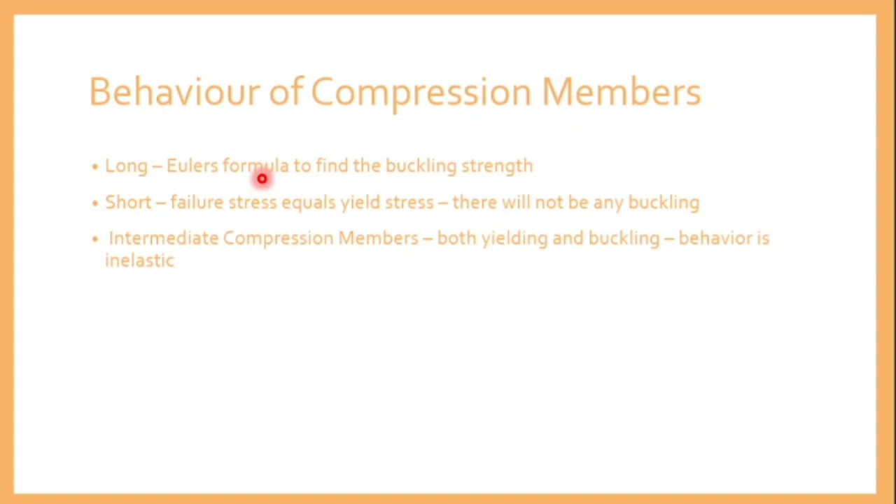Between these three, you can use Euler's formula for solving long compression members to find the buckling strength. If you have a short compression member or short column, you find the failure stress by finding the yield stress of the structure, that is stress equal to load by area. Simply you can use that formula to find the compression strength. But if you're using a long column, you have to use pi square EI by L square. This is Euler's formula, since you need to find the buckling strength.

The behavior of an intermediate compression member is that it might yield or it might buckle, so these two possibilities are there. Their behavior is inelastic. So before analyzing a member, you should check whether it is a long, short, or intermediate compression member. Within these three, your solution will apply accordingly.

Stress is load by area. Y, they have indicated in the sense of yield stress. Y stands for yield, F stands for stress. So if you want to find yield stress, you have to find yield load, that is Py divided by A. So you are cross multiplying here.

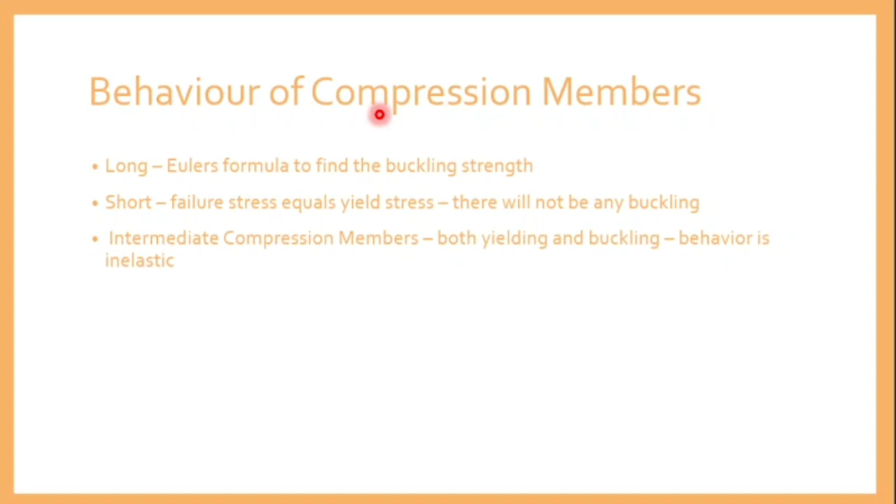When your material is purely under compression mode, you have a definite stress carrying capacity. This is brittle. The brittle material takes load up to the yield load. When you increase beyond the yield load, it will not change further. So this is the mode of failure. The idealized material behavior for rigid and plastic — rigid is also called brittle.

If you want to find the reason for decreasing strength, the first one is imperfection, as I said in the last classes. Your column will have imperfections. That is, if 250 mm by 300 mm is the given dimension, there might be imperfections while constructing. So this is one reason why you are not getting the whole load — along with initial lack of straightness.

The column will not be straight throughout from the bottom to the top. If you check that, you can use a theodolite for finding the straightness of the column. You can check this for a multi-story structure — there will be deviation from the ground floor to the top floor. The column will have slight deviations. Due to this deviation, the column or compression member might not be able to take the full load. What formula are you using?

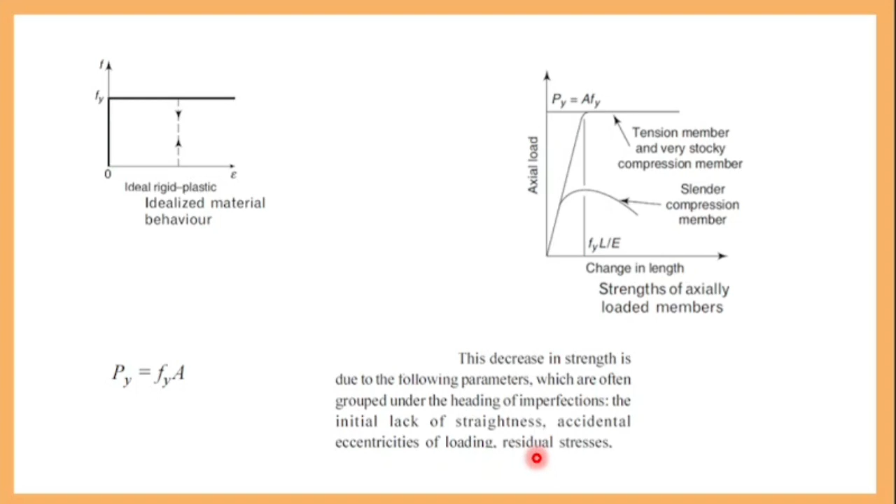If you are making a steel member, your accuracy is much higher because steel members are precast, so your accuracy of straightness will be much higher. If you are making a concrete element, your perfection might get lagged, plus accidental eccentricities of loading and residual stress. Due to these reasons, your column takes the reduced load and it is buckling.

Now you take IS 800 table 10, the buckling class of cross section. Check page number 44. When you want to design a compression member, your member is either an I section - this is rolled steel I section, and this is welded I section. What is the difference between rolled steel and welded I section?

Rolled steel is cast in the manufacturing stage itself. What do you mean by welded section is, you will be making it in the shop, you will be getting flats - these are all called flats. So you will be getting flat sized members and welding them either in the shop or at site.

If you know this, you have to use this condition - this is higher than 1.2 and this is lesser than 1.2. So you have to check the height by breadth of flange ratio to determine the buckling class. If you are using an I section with height by breadth flange ratio lesser than 1.2, you have to go for buckling class B, C, D. So here the conditions are given.

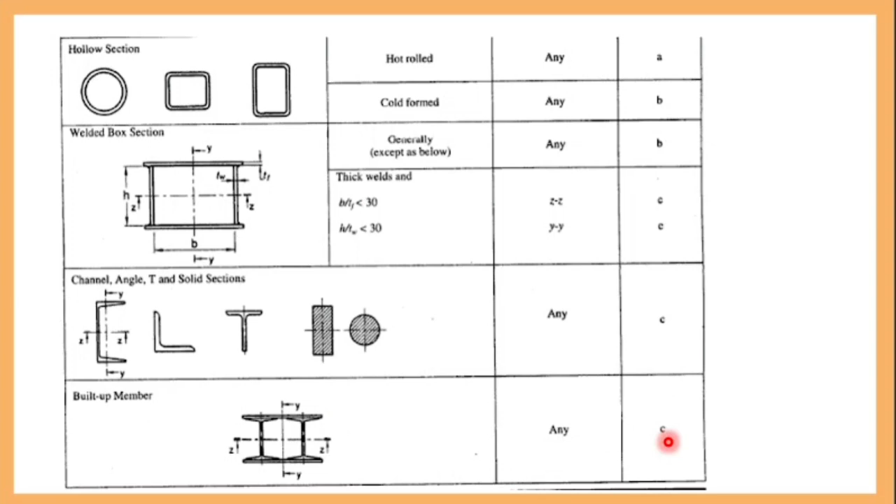Now you take down table 11, effective length of prismatic compression member. Where is it available? Page number, the next page, table 11, you can see the effective length.

If one end is fixed and other end is free - in your problem, they will give the conditions, either it is fixed or hinged, like that, they will give conditions. You have to check here: one end is fixed and other end is free. If this is the case, and the length of the column they have given is 10 meters, you have to multiply by 2L, which means 20 meters. So likewise, you have to check for all the conditions - this is one end fixed, other end free.

One end is hinged and other end is roller - they have given each end, so either you are restraining translation or rotation. That's how they have given the conditions.

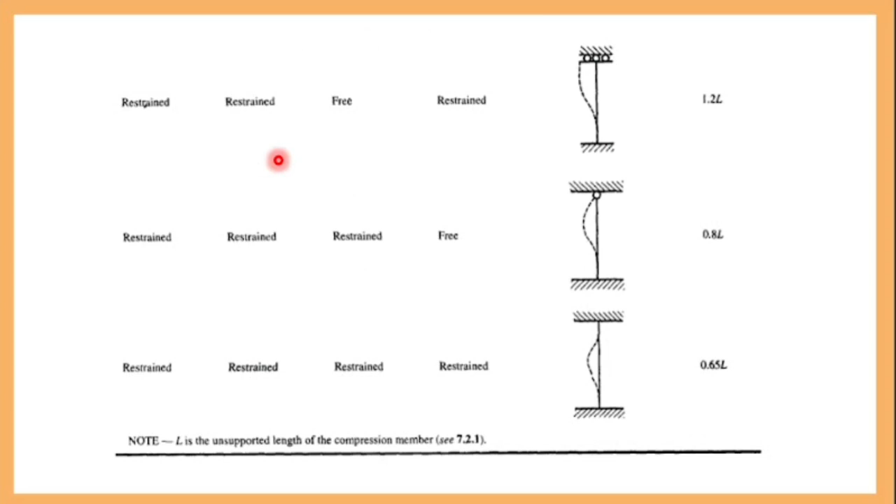Now you are having this much of columns, or this much of compression members, which are used in practice in the design of steel structures. This is being selected based on the functional aspect of the structure.

If you are connecting with gusset plates, that is for a truss. In a truss you will have compression members, and there you can use a single angle section. But if you are using it for a column that you want to cast and build, you will not use L sections there. It differs—there you will use a rectangular section, either rectangular or square. For any truss members, the compression members will be in this mode.

So how these members are being selected is a functional aspect of a structure. What is the function of the structure? Either it is going to take purely axial load, or axial load and bending load in combination.

Now, the functional aspect of the member—what member are you using? The compression member might be in a beam too; not only in a column will you have compression, you will also have it in a beam. So what is the functional aspect of the member, and which member are you using? According to that, you have to select the section.

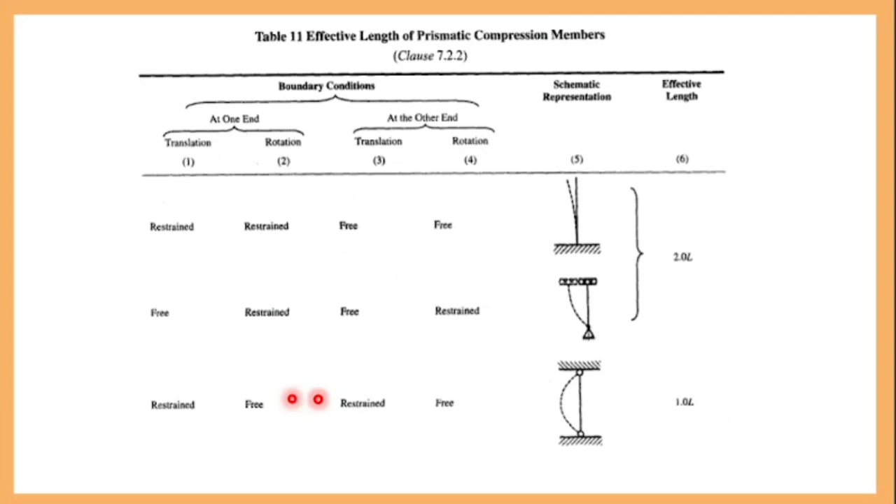They have given a case of both ends pinned. The criteria comes from checking table 11. So you identify what condition it is there—what is your condition here? Both ends pinned means hinged, both are the same. This is the condition: restrained for translation only. You can see both ends are hinged, so L effective is 1 times L.

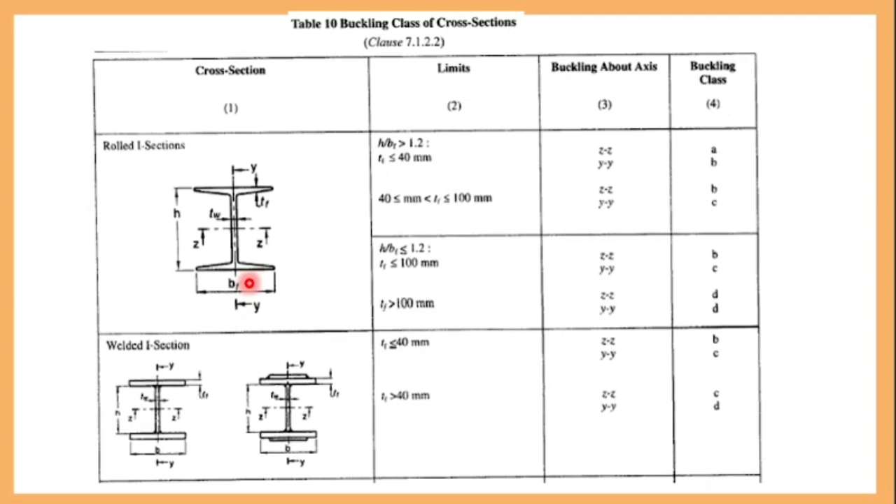Now, the second table I have shown you—what is the buckling class? You have to find H by BF, so you divide H and BF. To find this parameter, you go to annexure H, where you will find ISHB. In annexure H you can see ISHB 300—this is what they have given, two ISHB 300 sections. Can you observe this? They have given two same sections, but the difference is the first ISHB is 63 kilogram per meter, and the second is 58 kilogram per meter. So what is the case in your given data—either you use 63 or 58? 577 is in Newton—how to convert into kg? Divide by 9.81.

58.8, this is the class you have to mention. Now if you are having this section, what other things have they given? Thickness of flange (TF), thickness of web (TW), radius of gyration, section modulus, all components, and the width of the flange.

Now you have to refer to this. What is the given data? First write these data: Fy is yield strength, which is 250 Newton per mm square. Fu is 410 Newton per mm square. So these are the given data.

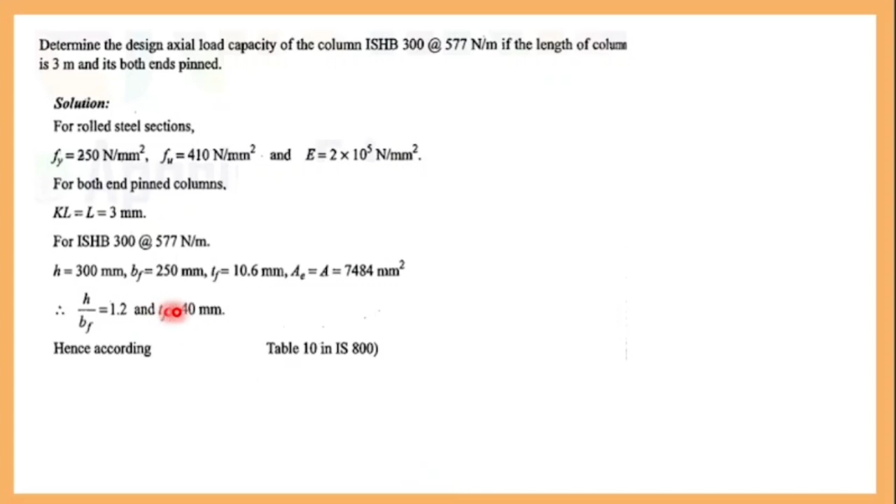And what is thickness of flange? TF is 10.6, so it is lesser than 40 mm. Now check this table, your class comes under here. You can see this is less than 1.2 and this is more than 1.2. Since your value is exactly 1.2, you go for this value. Now your thickness of flange is lesser than 40 mm, isn't it? What is your thickness there? 10.6, so since it is lesser than 40 mm, you can use this case.

Your buckling about axis will be YY, and you have to take buckling class B. Now this is your data. After selecting this, it falls under buckling class B.

Now in your code book you have this list of formulas. Take down clause 7.1.2. Check page number 34, look into that. Can you find this formula? What is PD? Design load. What is the question asked here? What is the design load for your column? Now your design load is, they have given the formula.

Design load for any compression member is PD. So PD equal to AE into FCD. What do you mean by AE? Effective sectional area as defined in 7.3.2. Then what is FCD? Design compressive stress as given in 7.1.2.1.

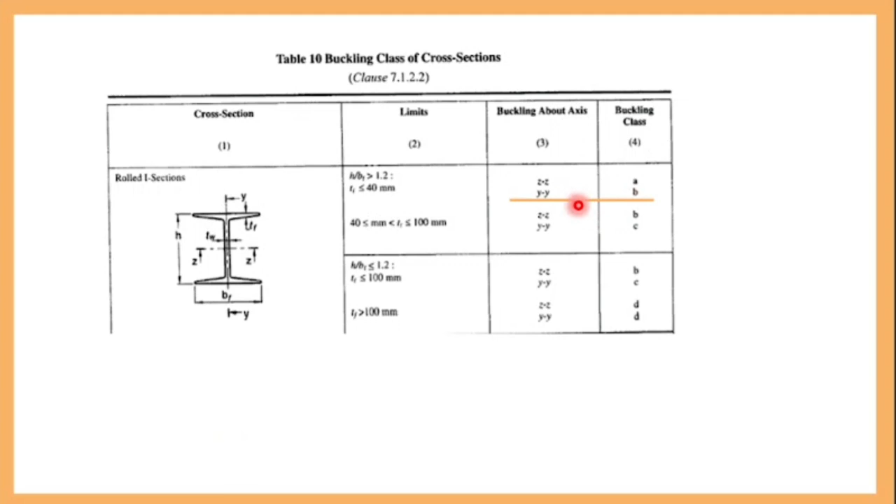And for finding alpha, how to find alpha, they have given a separate table, table 7. So what class do you have to select? From here you got the class. What class do you have to select? Class B. For class B, what is the alpha? 0.34. So instead of alpha, you have to substitute here as 0.34. In the alpha here, you will substitute 0.34. Now lambda you have found out, that is 0.624.

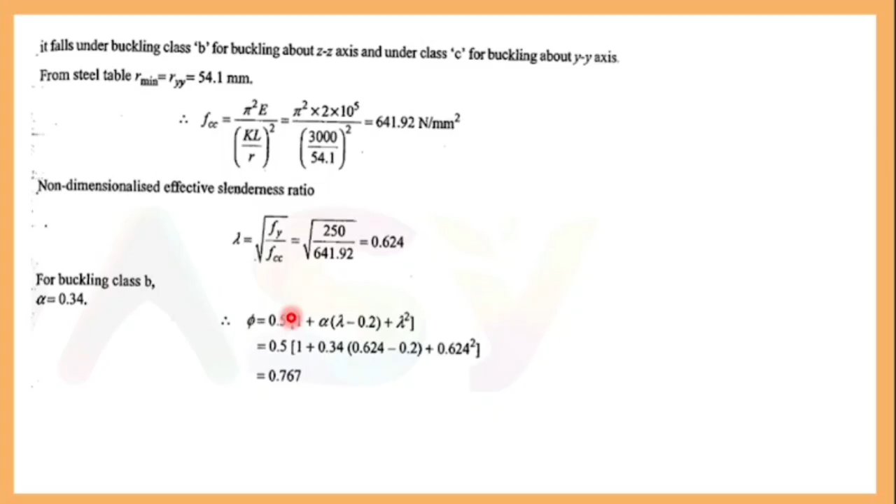Now the components are known here. See, all your values are here. FCC you can find it, you will be getting, divide it and root. You will be getting alpha as 0.34. Lambda you got, you can find phi here. And if you know phi, you can substitute here, and lambda already known, you can find FCD. And after finding FCD, you can substitute here, and area, that is the cross sectional area.

It is given in the annexure H for I section. You multiply that and you will be getting design load. How to find FCD? Fy by gamma MO.

Fy is 250, they are given. If you substitute these values, we will be getting FCD as 187.36 Newton per mm square. So if you got that, FCD will be known.

And in that formula, the other component is AE, that is effective area. 7484 is substituted here. Where will you find this? Can you find the area here? Area of cross section.

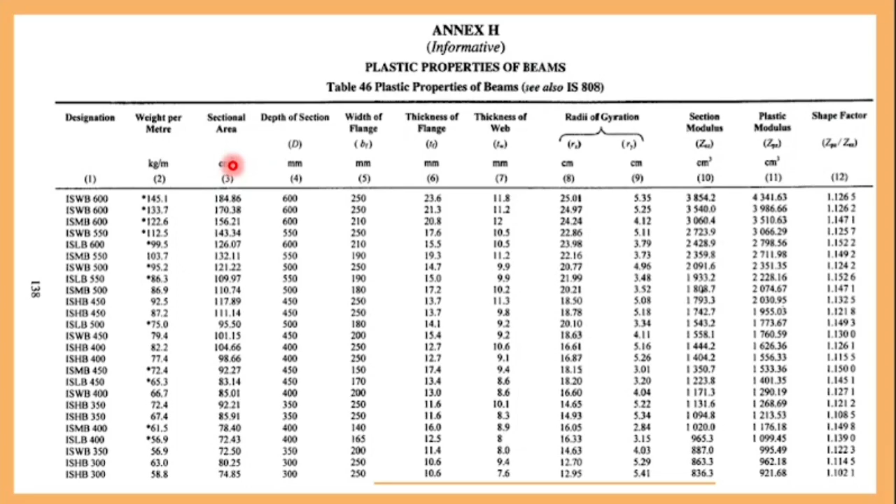74.85, they have given in annexure H. In terms of what unit? Centimeter square. You are substituting everything in terms of millimeter square, so you have to multiply by 100. Then you will be getting this value as...

7485, if you multiply with 187, you will be getting this value. And in terms of kilonewton, 1402 kilonewton. This will be your answer.

Now, for finding working load, you have to divide it by factor of safety, which is 1.5, and you can use 934.8 kilonewton in that column.

A column member is given, that is ISHB, for a size of 300. What is the load carrying capacity of this member? 934. So up to 934 kilonewton you can apply the load. If you go beyond that, the section is not sufficient, it will buckle and fail.

Now what have they asked? They have given a section ISHB for two grades, that is 577 Newton per meter. For this grade, what is the load carrying capacity they have asked? Finally, you have found that the load carrying capacity is 934, which is your answer.

And if you give more load than that, what will happen? The column will buckle, that is, it will bend. Your column will bend. Okay, now you have another technique which is much easier than this to find this load.

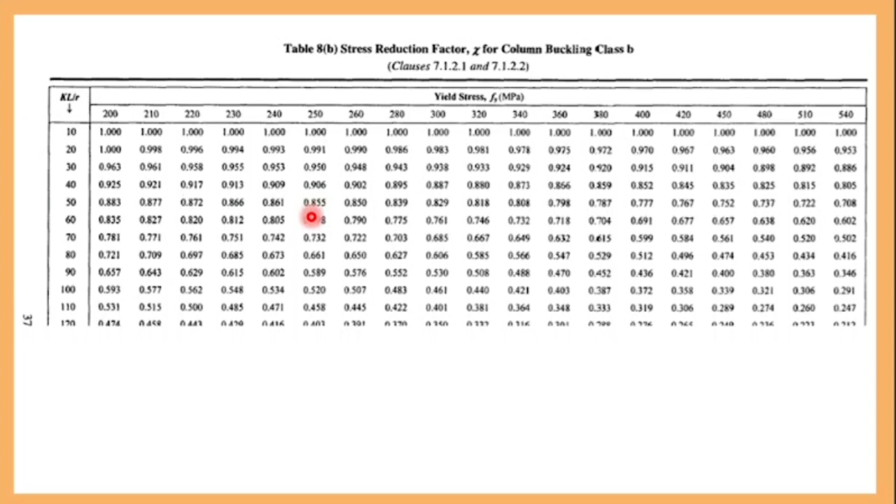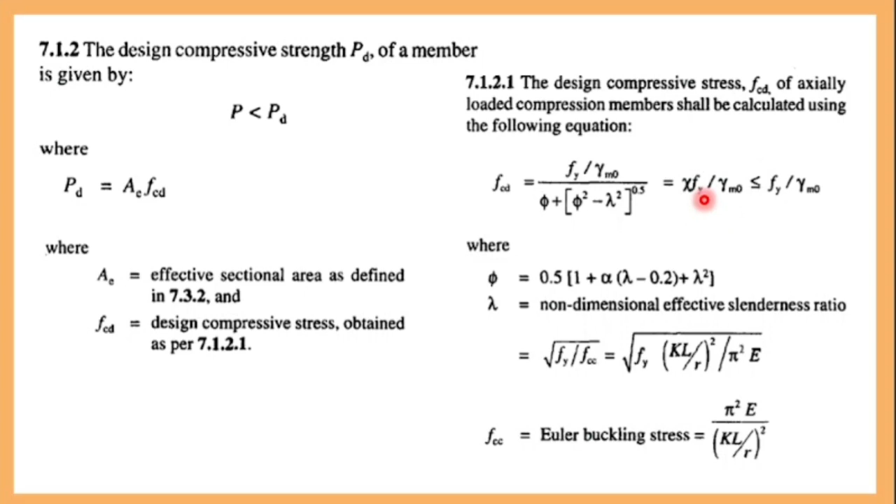Check that, are you getting the same answer as FCD? Now you have the third technique. First one is given, second one is finding chi value. Third technique is design compressive stress by using table 9b.

You check with table 9b. Previously you checked 8b, now you check 9b. You have the table for finding FCD for buckling class B. They have given the yield stress value directly. For 50 they have given directly as 194, and for 60 they have given 181.

For solving a single problem, the code gives 3 options. Either you can use lambda and phi, find all the data and do it. Second technique is finding the chi value, you can multiply with Fy and find the solution.

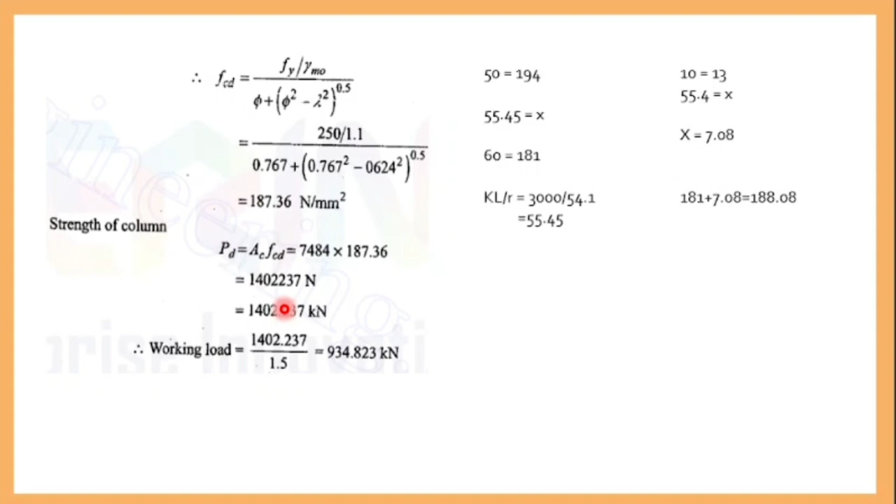Which technique is easy for you? 1, 2 or 3? Third is most direct. So in future problems you can use any one technique and you will be getting the answer. In exams you can solve by any one technique and get full marks. But the best way is to use the third technique, that is 9b, compressive stress directly. First find KL by R value and you can solve this easily.